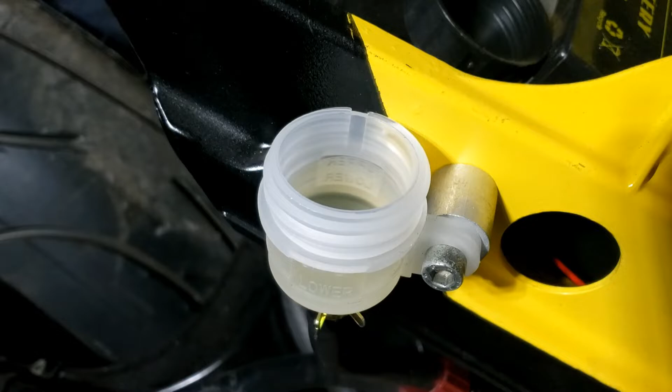Next stage, let's start topping this up with fluids, starting with the rear brake.

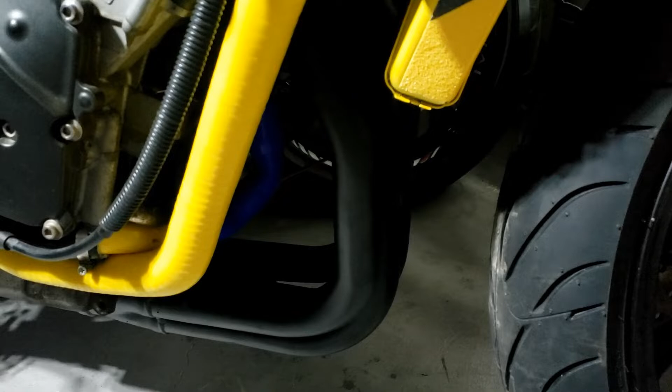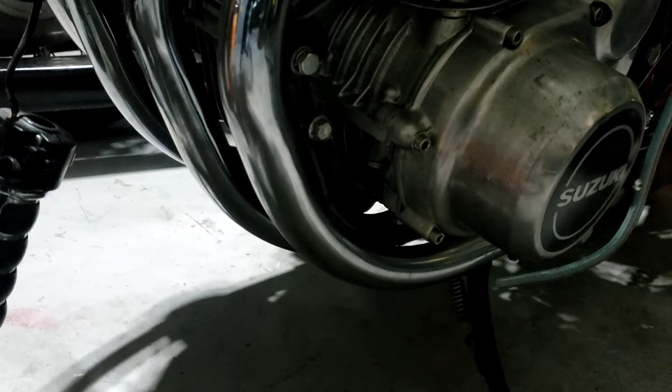What I don't understand about the R6 is why the exhaust sweeps forward. It's not even a straight drop, not a 90 degree angle - they actually sweep forward and then back. I get the idea of a nice smooth flow, but this is a 1980s bike design versus this 2003-ish one, and there's nothing in the middle there, as you can see. I don't get why they do that.

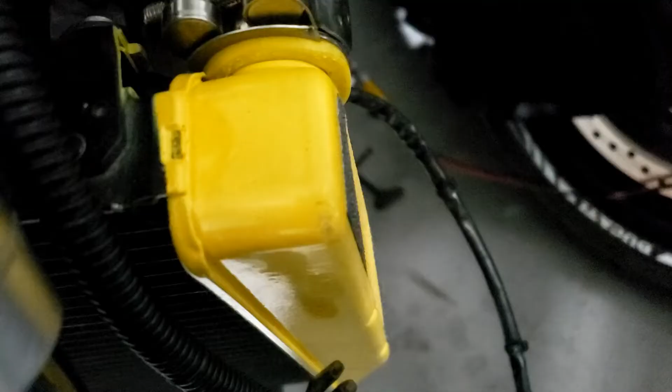So next up is the fan. I'm either hunting down the original connection, or I have a cunning plan - we have a spare switch up here that could just be putting on the fan. We have that in the race car. I like the idea of a manual override.

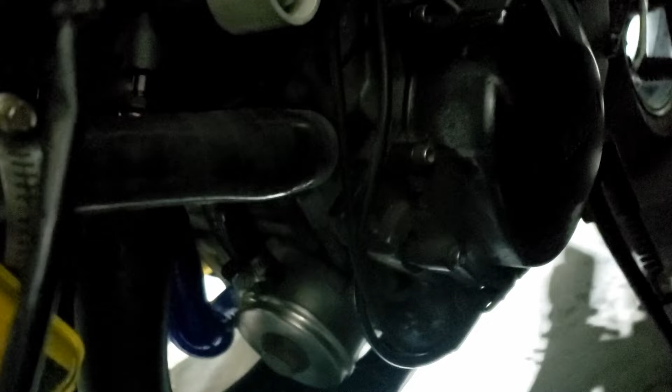That may happen. I happened to be down at IDR yesterday working on the Stratos, and we had some leftover hose which is exactly the right orifice - in fact a little bit tighter, which is even better. And plenty of it, as you can see, because I've already cut the piece off that I needed, and that fits beautifully, absolutely beautifully in there. I don't know if you can see the curve, but that's a perfect curve, and it's away from the exhaust.

Good and clear. Very pleased with that, just needed another inch. In fact, I cut it a little bit longer than I thought I needed, just to be safe, and then adjusted it by about half an inch.

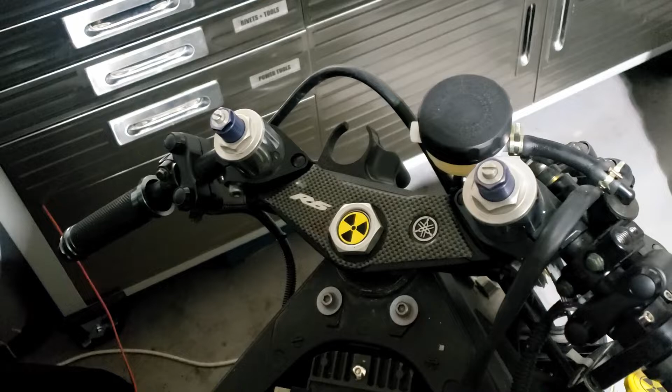So all is good. We're kind of near the end of this project now, just a few things to tidy up. And as always with a project that previously had a fairing, there's nowhere else to mount the bloody speedo. So I'm thinking options are minimal, honestly.

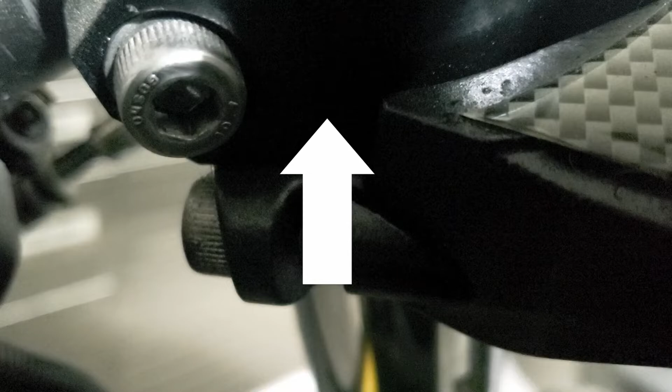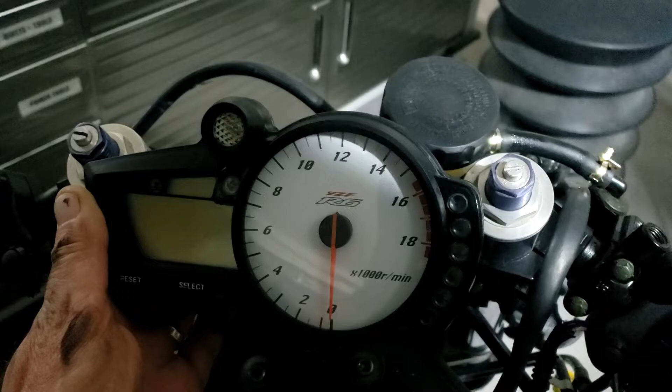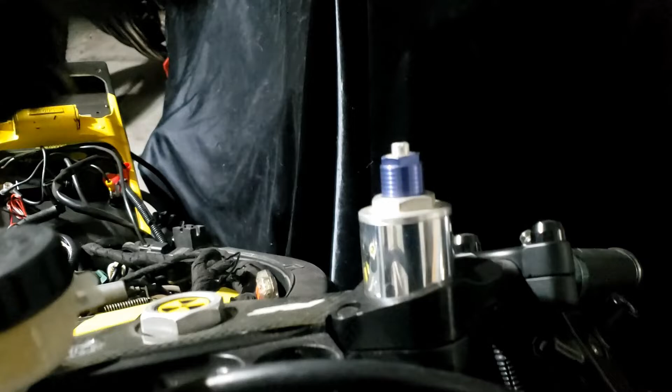I could either put a big rod in there and mount it off that - I'm not very happy about that. I could squeeze in mounts into those clip-on connections that come up and over and sit it here, or off these two prongs, which unfortunately don't have screw threads in them. You could put it right out here somewhere, but I think that's a bit crappy - not from a riding point of view maybe, but from an aesthetic point of view it's a bit shit.

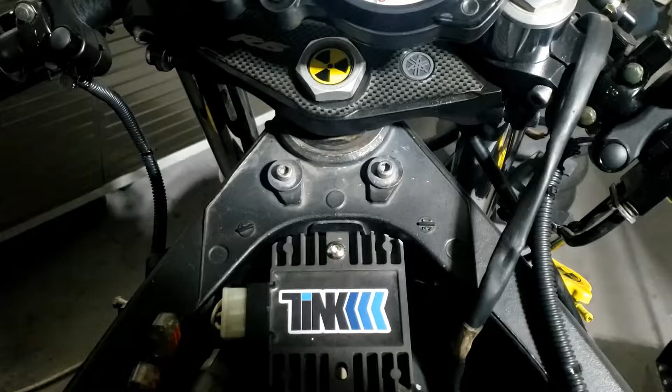I did start measuring up my idea about putting something between the handlebars, but I don't know how I'm going to fit it. So there's all the measurements, it's all drawn out, but how do I secure it on here? There's no thread. So I'm at a bit of a loss, which is always disappointing when you've got no ideas. I think this is where I want it to end up, but I just don't know how to get it there.

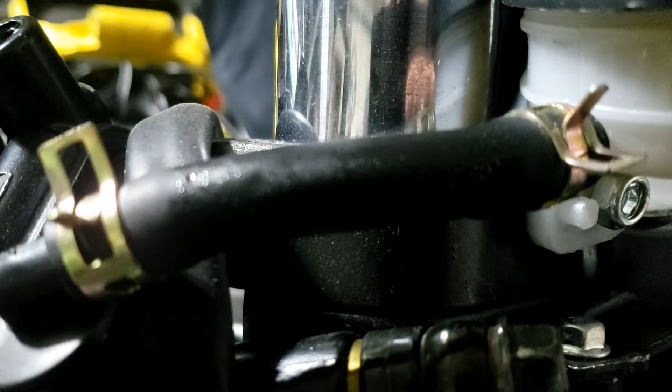Well, this is interesting because I dried this off last night or the night before, and the supplied tubing is literally bleeding brake fluid. Beware.

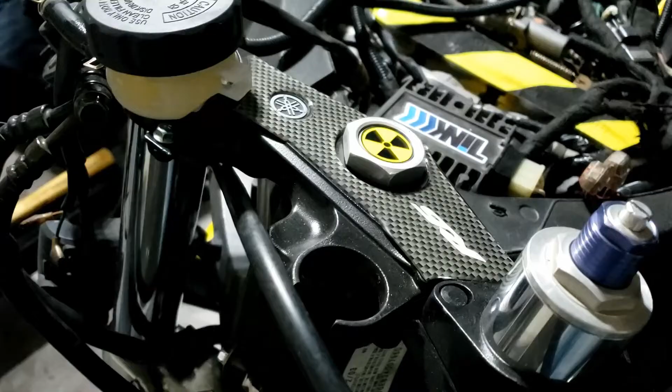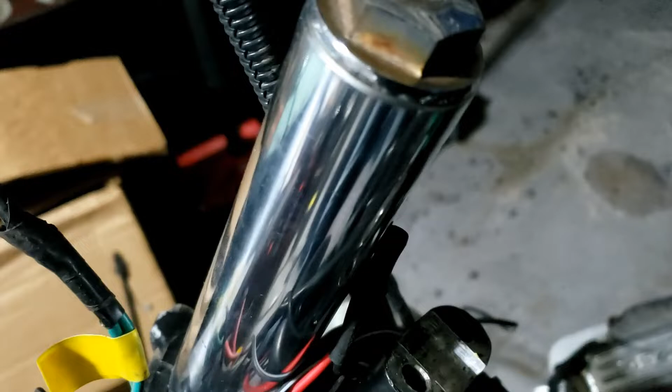Well, the more I look at this, the more I'm favouring doing something coming out of there. And here's the reason why - assuming the front fork swap on the CB750 with the GSX R750 forks goes okay, I will not be needing these front forks. I'm not going to put them on eBay because I can't imagine what the shipping would be like for me to send them somewhere. And the beauty of it is that these are exactly 34.8 millimeters, so let's call it 35, which is exactly the same as that.

So I have an idea, I have a cunning plan. There, it doesn't get much more sketchy than that, does it? What is he up to now? Okay.

That was the most accurate way of measuring where the holes are, and that's where the cable goes. See? So if we cut the fork at an angle that's suitable for the speedo, then all we need is a nicely engineered plasma cut piece from IDR to mount three holes solidly. Yes, I'm going to design something tomorrow.

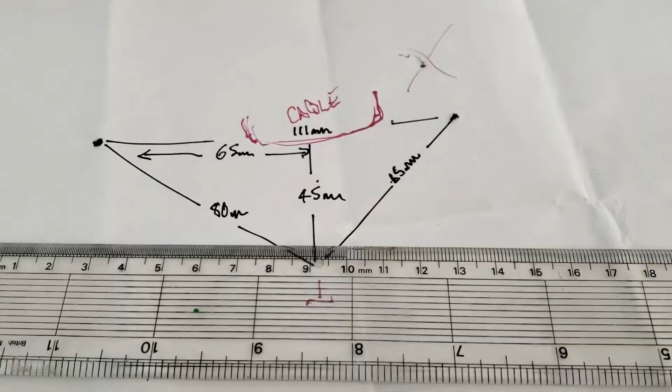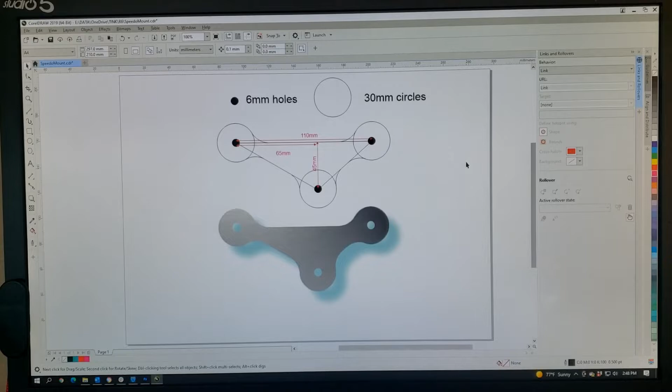And there's stage 2 of it, measured with a ruler that I can actually read. I must remember to take that home, because that metal ruler is good for nothing in terms of measuring stuff. It's good for cutting stuff, but yeah. We're just about to draw that on a blank sheet of paper, virtually. And there we go, finished article for IDR, mocked up and measured up.

Lovely jubbly. My dear wife bought me this bottle of wine because she thought it might help. I don't know, what do you think?

So it'll be something like that.

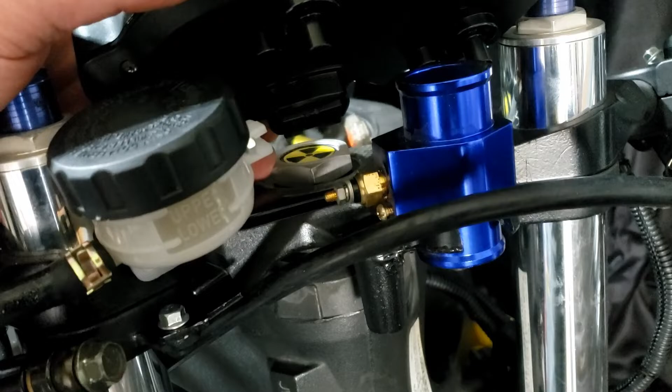Obviously not using that, apart from anything it's got a bloody great hole in it. And what I realised is that it would be a terrible waste of the forks, and they probably wouldn't work anyway, even though they're the right diameter, because of course they're hollow. I really want something that's solid, so I can drill a small hole in it and carve a face that's at an angle, be able to tap that out and mount the device and the bracket to that.

Which reminds me, I need to modify that design to ensure that it lines up with the aforementioned post.

And I found some 35mm, I think it was 1 3/8 inch, aluminum rods, but I had to buy 4, a foot each, for $45. I don't really want to do that, so I've asked them if I can just buy 1. We'll see. Oops, missed.

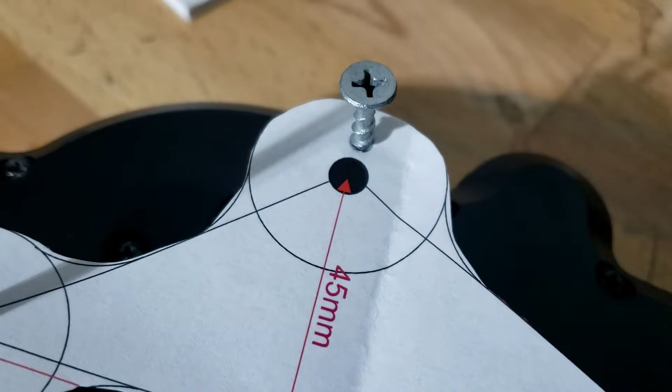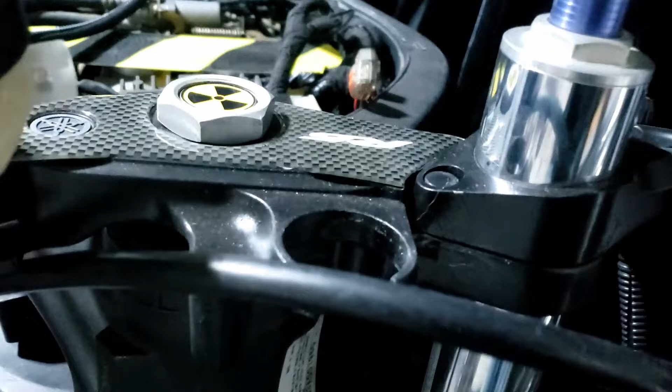10mm out, I guess. Okay, well, anyway, that bit's cool. That all works. And then we need to work out where it's going to mount on the mount, which is this bit. There we go.

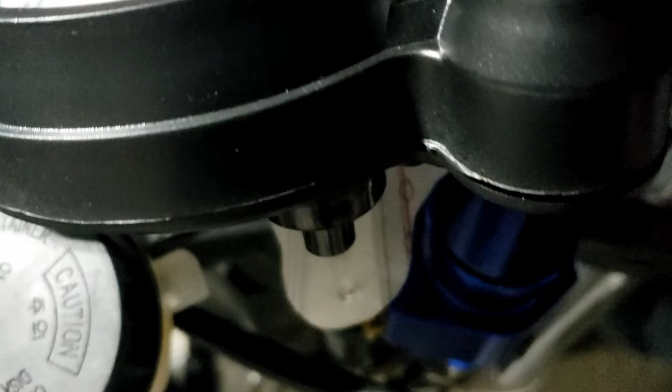It's going to have to be something like that, in which case I'm going to need to put another bulge on the other side of that. So that's worth noting.

So I think that's what we're looking at now. Well, we're definitely looking at it now, but I think that's what we need to do.

And we're replacing those leaky brake lines that you can see, further deterioration, with, I hope this works, some tubing that I bought actually for that little Honda I had, and I think it's good for fuel and stuff. So we'll see.

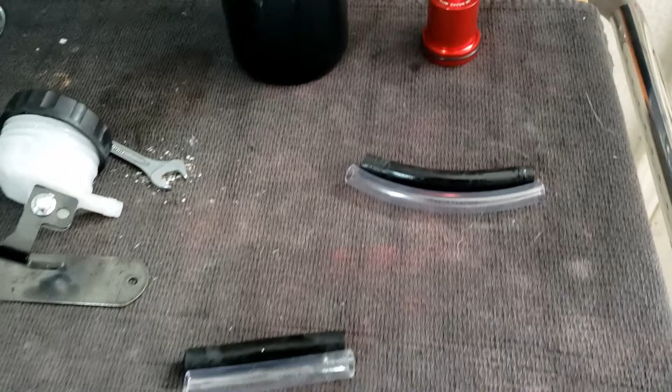So yes, both on the Yamaha and the Suzuki, we are replacing those supplied brake tubes, which clearly aren't.

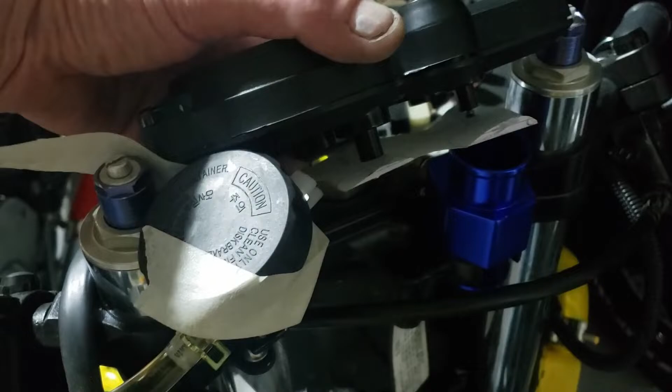I'm back on this, and paper prototype number 4, I think, and we are getting there. I think it needs to come a little bit more forward though. Well, the paper was folded over the wrong way, which didn't help, and I think actually that's going to do the job.

So I think we need to ship that off to IDR and get that laser cut. And you'll notice I put another little curve in there rather than a straight line from that edge to that edge. I'm just trying to make their life more complicated, because I can. It's actually quite fun designing parts that you can get created if you know the right people.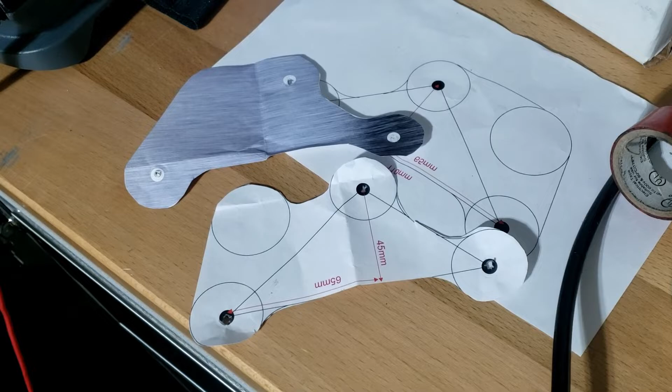So this will do the job nicely. I just need to resolve the issue with the 34mm aluminum tube and make sure I can get it.

Couldn't resist an extra bit of yellow flash. Yeah, it was that heat guard, whatever the hell it is, on the exhaust for the Yamaha, but I don't know, I could only get one screw in. And it's not guarding heat from anything apart from the underside of your boot. It's probably not very necessary. And I do mean boot, not trunk, I'm not talking about.

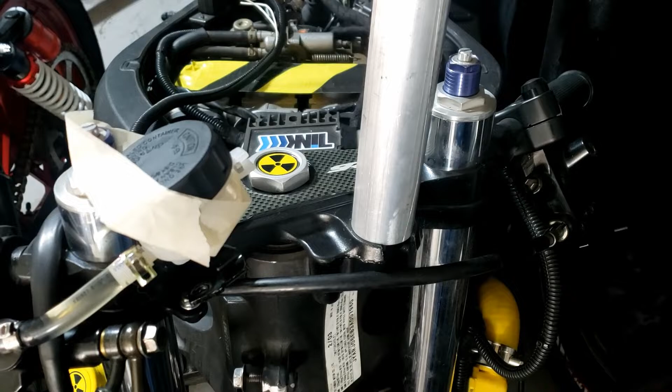So, closest we could get off the shelf for the R6 Speedo mount was 1 3/8. Because these are extrusions as opposed to being machined or milled. And it's just a little bit too large to go in there.

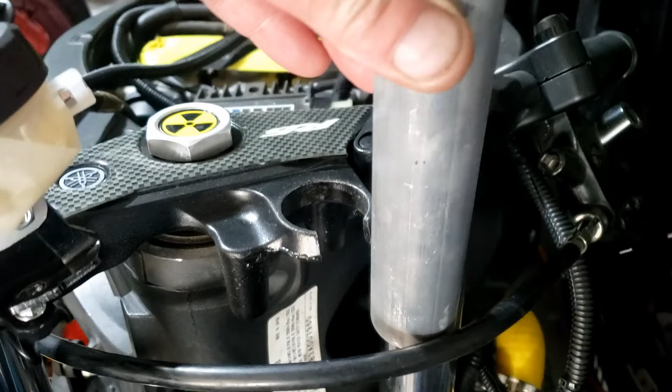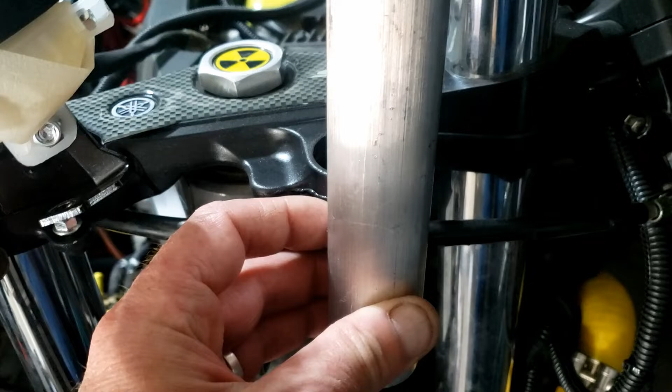So I'm going to measure again and get a little bit shaved off, and maybe not shaved off all of it, so the maybe I need to work out. In fact, that's what I'm going to do. I'm going to work out how much I need... ow! I'm going to work out how much I need to protrude, and then what angle that top needs to be, and then work out how much I need to shave off and up to what length. Yeah, that's what I'm going to do.

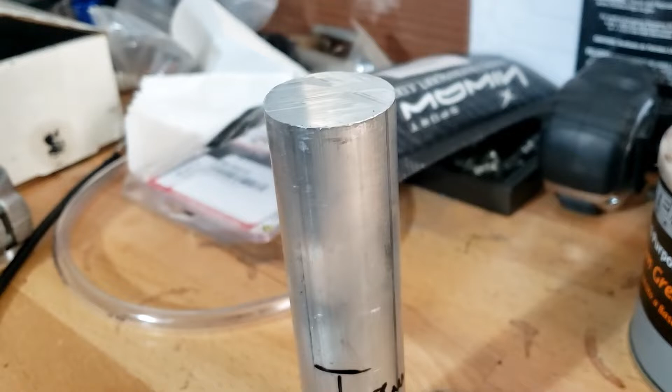Thanks to some help from my glamorous assistant, I managed to work out I needed roughly 80mm at the top to include the angle cut. And the rest of it I need to shave down to 34mm diameter.

So that requires a machinist, which sounds like a quick trip to Cottonwood to see my mate Adam. We haven't talked about Adam for a while - he helped weld in the roll cage for the race car, did the rear seat welding and creation on the Agusta, that bar at the back, and has built his own custom bikes in the form of choppers and incredible creations. There's no accounting for taste, obviously. No, he's just a fantastic fabricator and welder and machinist and everything else. And the best thing about Adam is he tends to do stuff while you wait, which is really cool. Just turn up, gets the job done.

That reminds me, I need to get in touch with Derek. Yes, I'm on the floor because I did phone Derek there and then, and guess what? He answered the phone. So who knows, the seat for the R6 may arrive shortly.

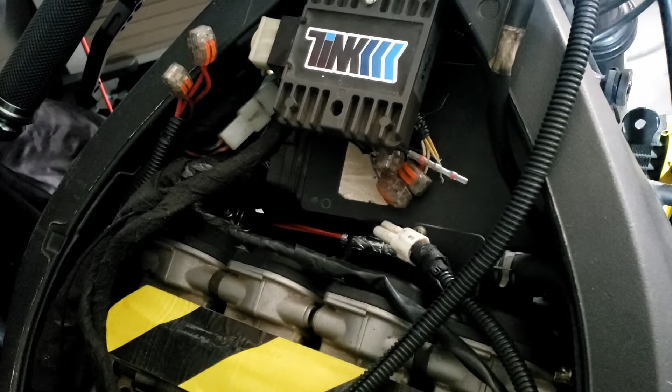Having picked myself up off the floor, I realise I've got to unravel all that stuff again and find the electrical connection to marry up with this for the fan. So that's going to be a pain, but it's just going to be tedious. Probably shouldn't take very long.

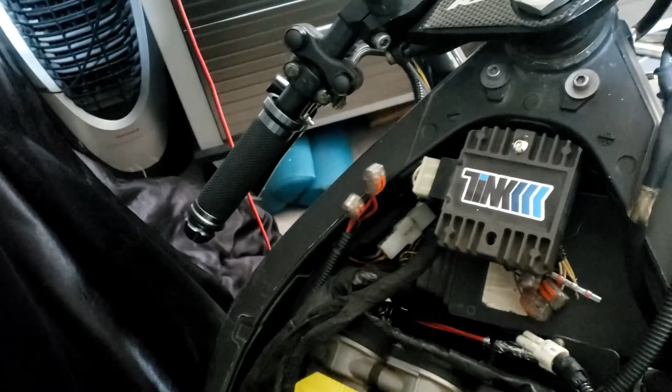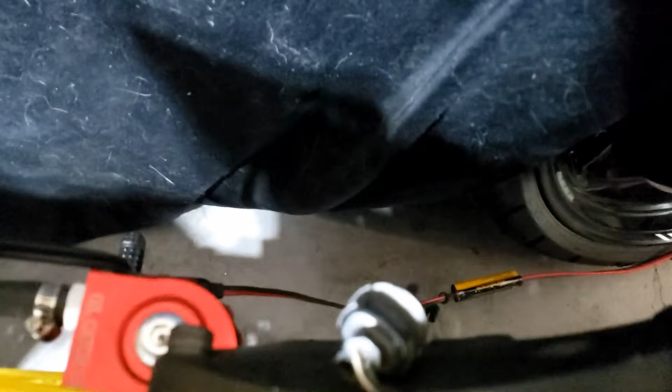And then what else have we got to do? Oh yes, we got sprockets and those things. And then we can put our overflow tank on, which will connect up to that, which goes down there. We're kind of getting close to firing it up again. Well, I say again - I cranked it over, it never fired up. But we're getting close to trying to fire it up again.

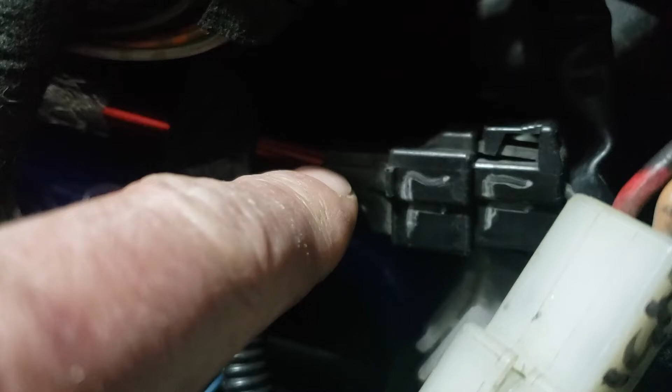Well, I found it, buried, obviously. So that's the fan hooked up, in theory.

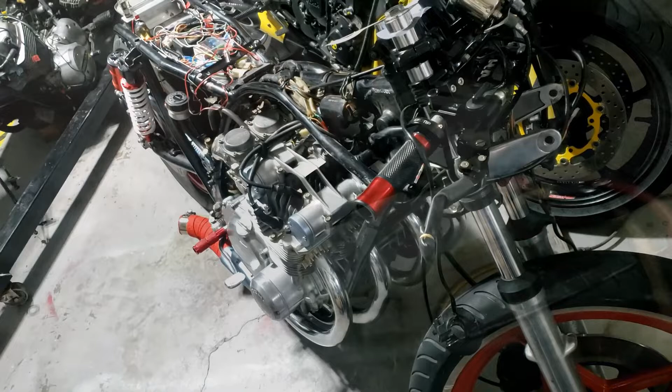And while I was in there rummaging around, I found this too, which is kind of the main fuse, as we've experienced on the Suzuki GS 550. If you're not watching that build, why on earth not - it's fascinating, look, there it is. Anyway, as I was saying, this is kind of the main fuse to the whole bike. If this goes out, something major has obviously gone wrong, but I don't really want it buried under the fuel tank.

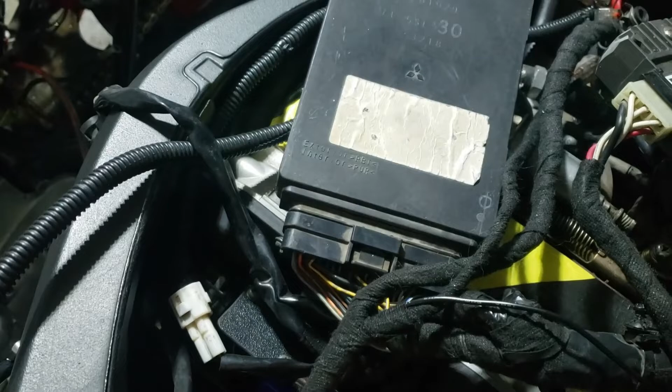I mean, you could at a pinch get to it through there. Really? Focus - through there, yes, you could kind of just about get to it. But that's a bit stupid, isn't it? But of course it comes off the ECU, or goes quite quickly into the ECU, and if we're going to put the ECU down here, that's where it's going to have to live. I don't know what else to do about that, honestly, so I'm afraid that's where it's going to have to go. Ferrari get away with this kind of shit, so why shouldn't I?

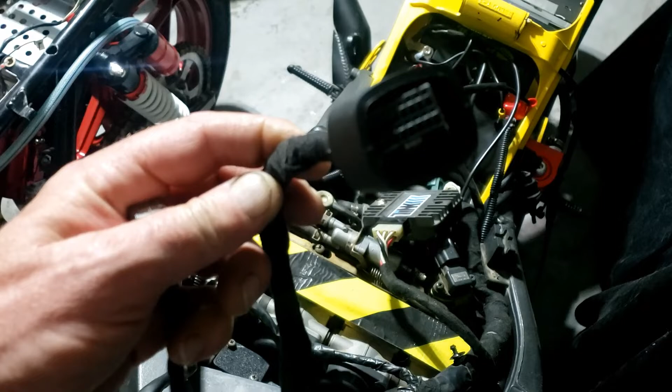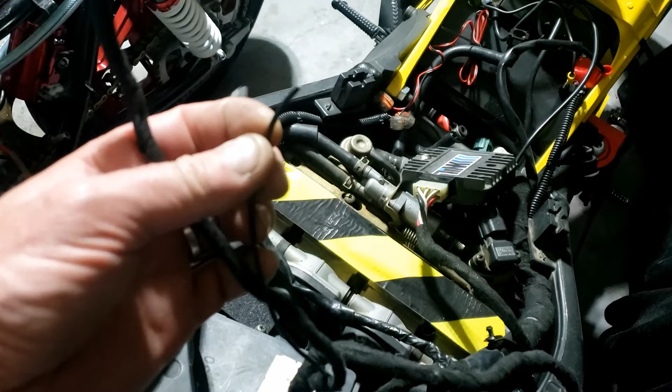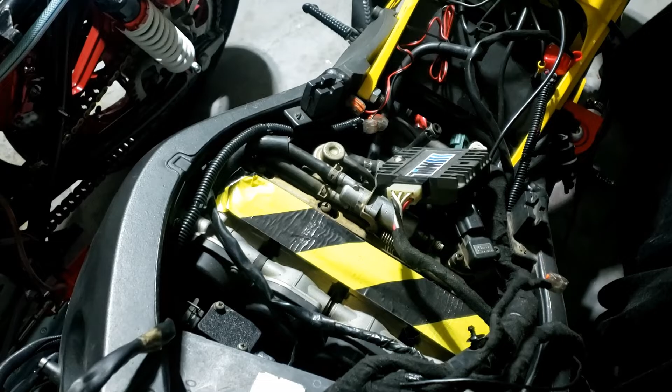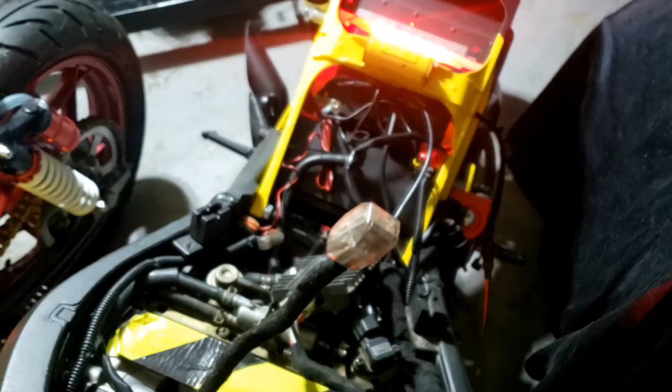Anyway, while I was rummaging, I found this, which is obviously the speedo. I also found this coming off it, which I don't remember, and I don't remember why I put that on the end of it. And it's not labelled. It has an earth by the looks of it. What the hell? Everything kind of turns on like it should when I hit the switch. What is that? What is this? Does anyone remember? It's probably something random like the horn, and I blocked it off. But why didn't I label it?

Amidst all that confusion and astonishment that Derek might actually be turning up, I think it's time to call it a day for this episode. I'll let you know whether he actually arrives in the next episode, because we'll have a seat to play with, and that'll be fun. We can start sorting out that back end, and then we really are on the homeward stretch with the Yamaha R6.